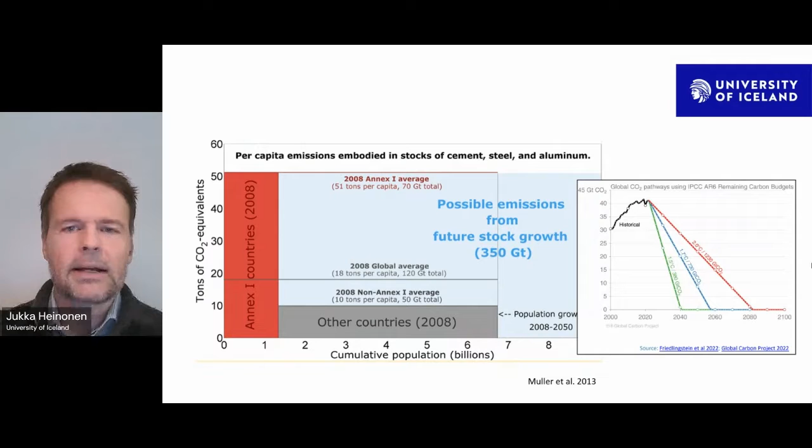And at the same time, when looking at what happens in the most developed countries, it's not like they would have reached some kind of a saturation level beyond which there's no need for additional infrastructure. It looks like the amount of construction is just increasing, and we are now hiding that development behind the general idea of developing a future sustainable built environment, but without thinking about this aspect at all, and starting to assess the emissions from the point when we have a new infrastructure system in use, whatever system it is in question.

What that has led to is, of course, that all kinds of construction materials are being produced to a higher extent than ever before. And I very recently saw a nice illustration of what cement production, for example, means if you try to illustrate it in some tangible way. A journalist calculated that if you produced a typical 30 centimeter concrete pillar, this amount of cement production would be enough to produce a pillar from the earth to the sun each year. Or if you put it in a thin line, you would need to produce it with the speed of light, just to give a little bit of perspective to what this means in such numbers.

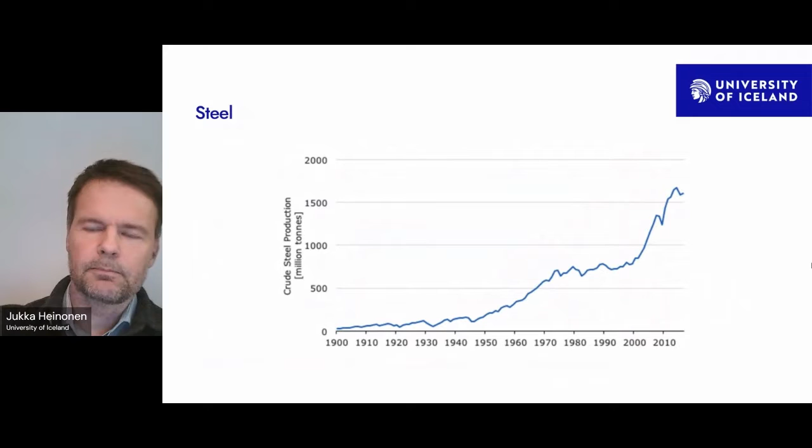There is one sort of underlying issue that I want to pay a little bit of attention to, which is that I see more and more in the construction industry, at least in the context where I work, which is most of the Nordic countries, that these environmental or sustainability certificates for buildings are gaining more and more attention, and they are becoming more and more important drivers for the future transformation of the sector, the industry sector overall.

And to me, it sort of looks like this green transition is more some kind of an illusion of such a transition than an actual transition. And this has a lot to do with the fact that these certificates pay very little attention to embodied emissions and to the pre-use phase overall, which then leads to a false image of a transition that would be ongoing in this sector.

This is a relatively recent paper of ours in which we talk about this issue and actually show that this indeed is the case. And what this leads to is basically an idea that almost the same buildings we used to have, suddenly with one of these labels, be it BREEAM or LEED or one of them, become sustainable or somehow green buildings.

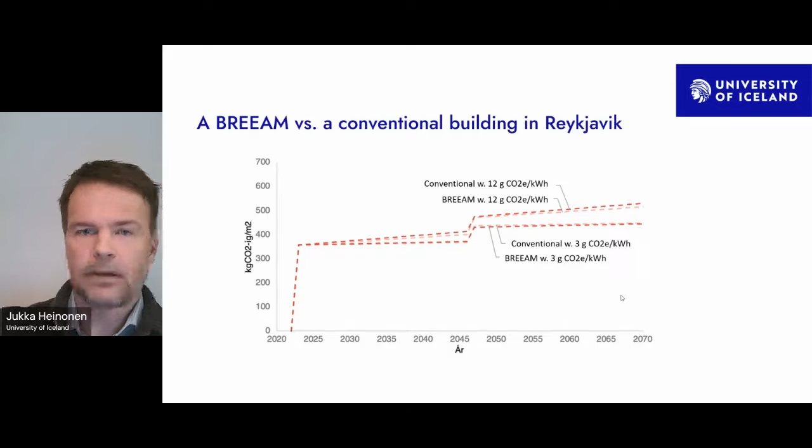I'll come back to end of life later, but when we calculate the end of life using today's technology assumptions, we might end up with misleading results, which would put conventional materials as the preferred option in some cases.

In Reykjavik, this is one of our pretty recent calculations for the city, in which we compare the different life cycle stages and the emissions from them. Reykjavik, in global terms a small city with around 150,000 inhabitants, has high construction activity and is growing fast. What we calculated is that currently the emissions related to the construction of new buildings is almost as much as the energy use of all the buildings in the city.

Looking at the future projection of how much the city will grow within the next 10 to 20 years, we're talking about emissions of around 2 million tons of greenhouse gas or CO2 equivalents from just this one small city. This is quite a big greenhouse gas commitment by a city that, according to its own target, is supposed to become carbon neutral around the same time as it's causing these 2 million tons of emissions. This is not at all included in the city accounts, nor really recognized by the city, hopefully now by some people after our calculation of it.

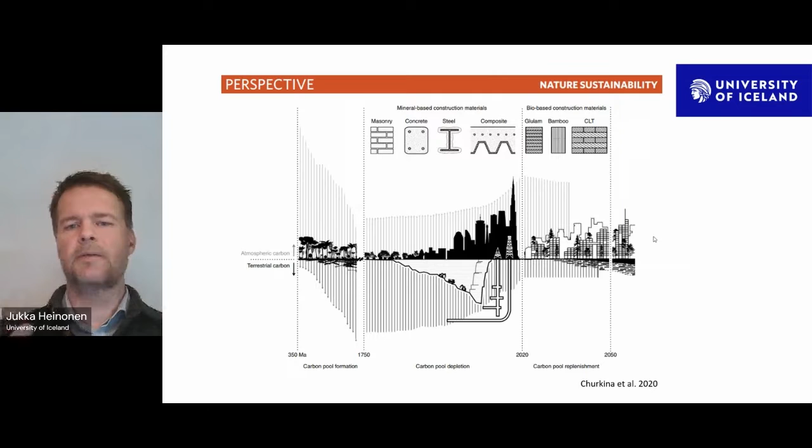Part of the long-term balance, or returning to an acceptable balance, the built environment overall could play an important role if we started looking at it from the perspective of transferring atmospheric CO2 or greenhouse gases back to below-ground and built environment storages, where it would then be stored over a long period of time. Once we reached such a balance, we would have a carbon neutral circle that would maintain this balance over time.

This would require kind of an entire paradigm change in terms of how we see the built environment, but at the same time, with the knowledge we have now, we can basically say that it's possible if we want to do that.

This is the Amiri et al. study from a few years back, in which they looked at different building LCA calculations that have been published in academic sources, and found that a relatively high number of them have found that the stored carbon in buildings using plant-based materials can be more than the emissions caused by those same buildings. So basically this means that on a building level, we can reach this kind of a positive balance.

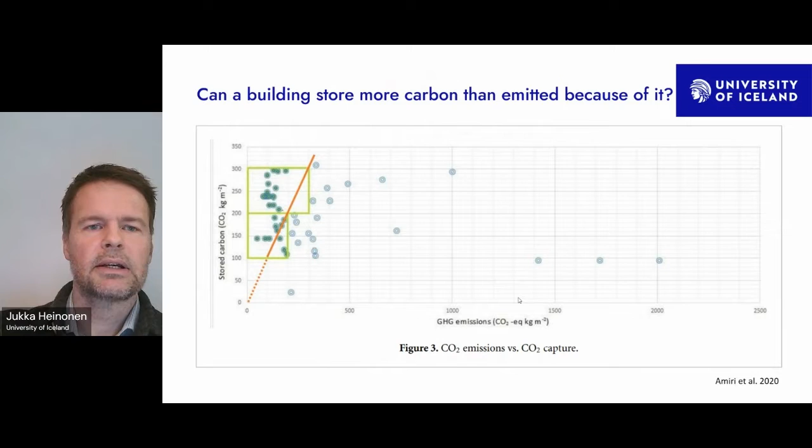And going beyond, this is a very recent study from Talvitie et al., in which they took a step beyond the Amiri et al. study, looking at a comparison between typical forests and cities that would utilize their buildings for storing carbon, and found that the carbon stock of a city can reach the same level or even beyond typical northern forests, which is quite interesting and an important signal

for this paradigm change to be possible, or the result of such a paradigm change to be exactly that the built environment could be an important vehicle in returning to such a carbon balance that would then be the desired outcome of our climate change fight.

And so far, we have basically been only looking at buildings. But of course, buildings are only one, important, but still just one of the infrastructure systems we could utilize for storing carbon and for creating this positive circle of sequestering and storing carbon into the built environment and making it neutral, of course, first, but even carbon positive,

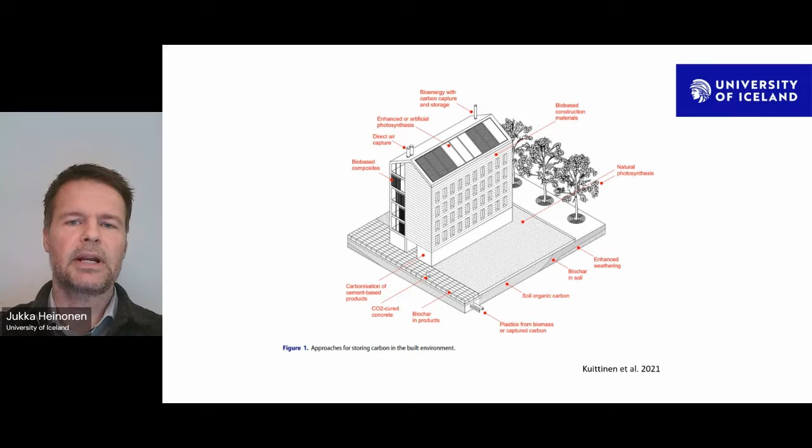And then when we start moving from buildings, where it has already been shown that we can find ways to store more carbon in the buildings than what is caused by those same buildings, when we start thinking about all surfaces that we have in the built environment and look at them from this kind of perspective, we could reach such a built environment that it would be storing more carbon in comparison to what is caused over time by the same built environment.

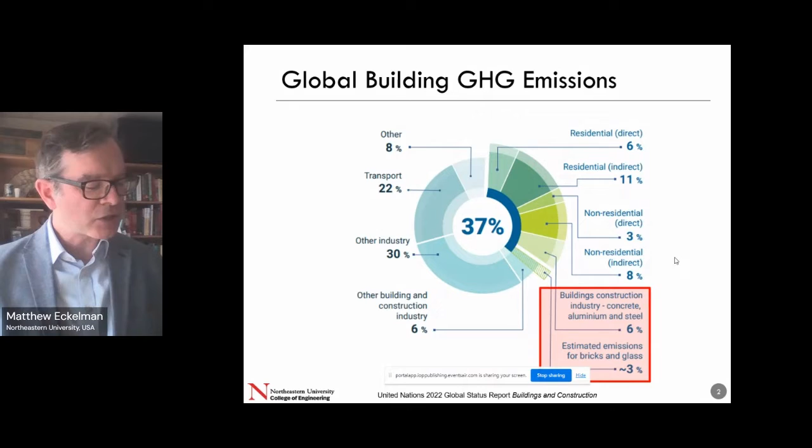I think we all recognize buildings are a very large piece of the puzzle around decarbonization, and especially when we're focused on building materials specifically, it looks like about 10% or so of the overall global greenhouse gas emissions comes from the production of these materials. And because of this recognition and the innovation ecosystem we're in, there are a lot of very interesting innovations happening right now to try to develop low carbon materials, low carbon iron using different types of bio-based reductants, completely carbon-free steel. This is a plant going up in Sweden.

Low carbon concrete that you'll probably hear more about today, various technologies for that, and even low carbon aggregate. So this is a company here based close by to me that's making foamed glass aggregates, very lightweight aggregates out of recycled glass. So actually, I'm very optimistic about the technology landscape that we're seeing around low carbon materials. But those materials have to work together in a building.

And one of the basic questions that we have in this space around environmental assessment of building materials is, which material should we build with? Which material is going to give us the performance we want to make beautiful structures that are high functioning, high performance, and also as low environmental impact as we can get?

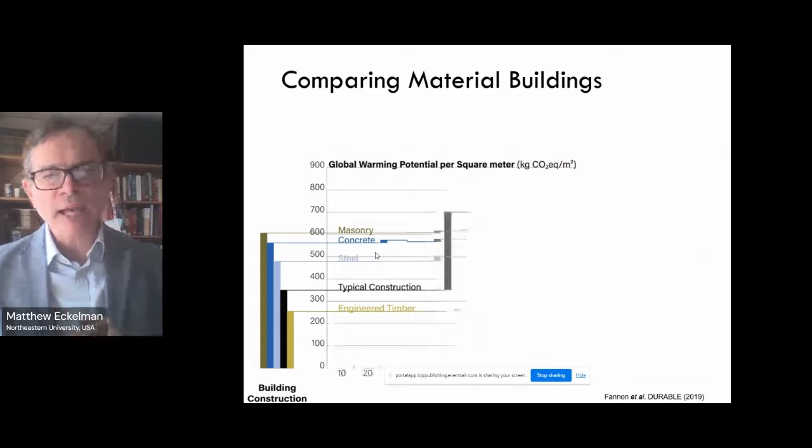But the insight we were looking for wasn't just the construction side. We wanted to see how these different types of buildings play out over long periods of time. And as we extend buildings to a long lifespan, not just a 60 or 70-year default, but a much longer lifespan that we would hope to see for a high-quality building, the impact of replacing poor quality construction, or construction that doesn't have a use, it's not a building that people want to keep around, it doesn't have a way to reuse it very easily.

The typical construction graph you can see gets larger and larger, far eclipsing any of these other buildings, which are designed in a way to be adaptable, to be reusable, and to have a longer life. So the idea here is, regardless of what building material we use, there should be a focus on longevity. There should be a focus on not just the architectural design, but also the structural design around longevity and keeping these buildings in service for as long as possible.

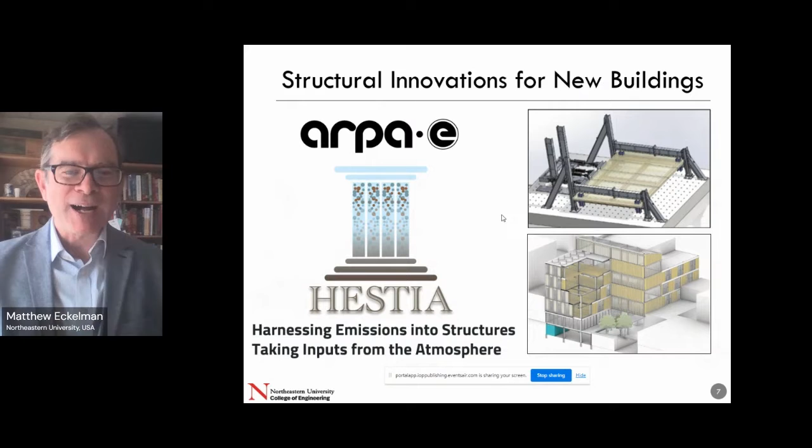Some of you might ask, well, why are we asking this at all? Why don't we just build all wood framed mass timber buildings everywhere? Problem solved. We'll just sequester all this wood in our built environment. And this will help not only with the carbon storage problem, but also with reducing those emissions associated with building materials like steel and concrete that we know to be very important.

So that's a really wonderful progression. But when you look at the market portion, how much of the market does mass timber building have? It's very, very small. One of the reasons for this is that the current ecosystem for architecture, engineering, and construction, the AEC sector, is focused around traditional materials. And people who work in this industry are typically very conservative. They're cautious, and it takes a while for them to become comfortable using new materials like mass timber, for example.

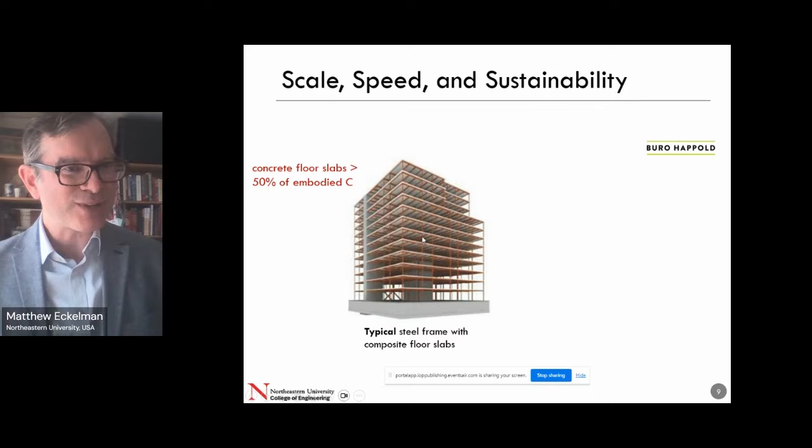So we want to find a way to harness some aspects of wood and also take advantage of the existing ecosystem around steel buildings. So what we're trying to do in this project is to find a way to move from this traditional, typical steel frame building with cast-in-place composite floors, so concrete on steel deck, which has major issues for greenhouse gas emissions. The floor slabs themselves, in a typical mid-rise or high-rise building, are typically more than half of the embodied carbon of the building.

In addition, pouring that concrete takes a long time. It has to cure, and that slows down the construction process. And it's very difficult to reuse these kinds of materials, especially these composite floor systems. So what we're trying to do is look at the same steel frame buildings, but using all cross-laminated timber panels, so wood-based floors. And it turns out these have lots of big benefits for the environment. One is we move away from all that concrete, so we're using CLT. This also helps with sequestering carbon.

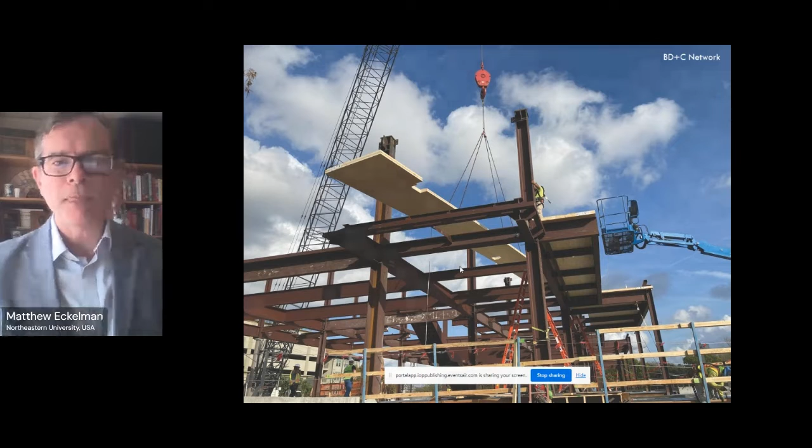So if we wanted to have a CLT-based, wood-based construction project here in my part of the world, we would have to import CLT perhaps from all the way across the United States or Canada. We might be able to import some from northern Quebec, or very frequently we import CLT from Austria. So we have transportation emissions from that, and we're not taking advantage of the bio-based resources that we have. There are some beautiful forests that had been used for many years for pulp and paper, an industry that has really declined in my part of the world. So these are forests with a lot of available wood that aren't being utilized.

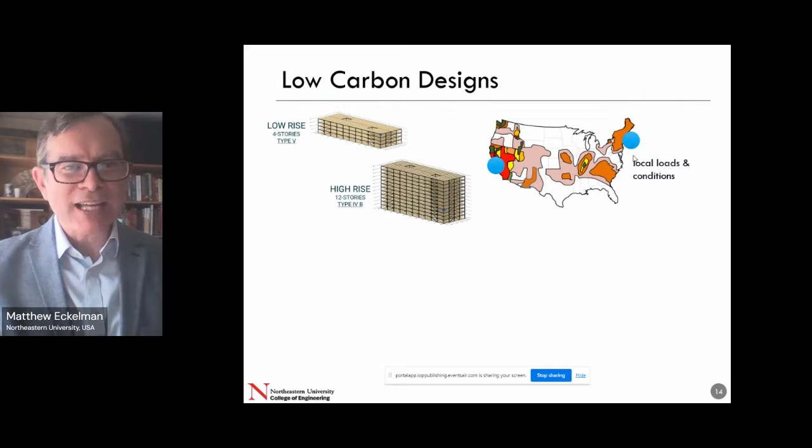In addition to that, we've played around with different structural systems. So what you're seeing in the top structural design here is just a very typical system where you have a standard bay width. So this is, I think, 30 by 30 feet wide bay width. But because those CLT panels are so long, actually they can go across multiple bays. This is something you can't do with cast in place concrete.

So instead of having these steel beams in every bay, actually we can get rid of a lot of the intermediate steel and just put the long 50-foot or 60-foot CLT panels right over 2 bays. And this has major benefits, actually. So we've used some very typical life cycle assessment software coupled with building information models. This one is from a software called Tally, which is a plugin for Revit.

And you can see when we measure the tons of carbon dioxide equivalents of this building, both the steel and the CLT, even just the baseline building, which is the one in the upper diagram there, we're seeing negative emissions. So as long as this building is in service, we're taking advantage of that carbon that's sequestered in the CLT.

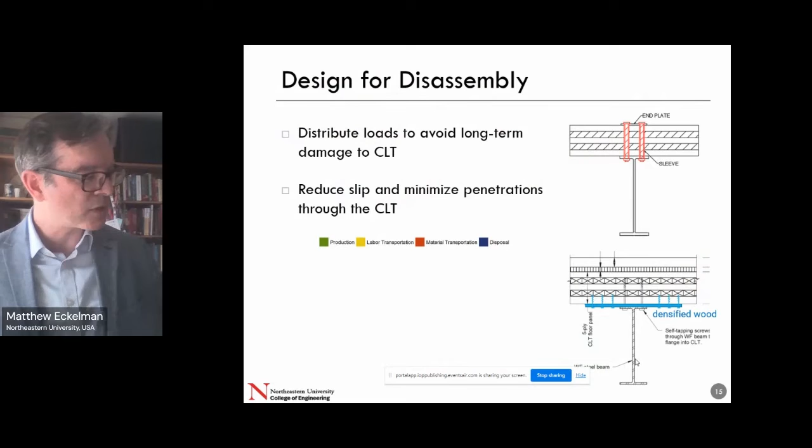This is only one half of the puzzle. The carbon sequestered in a building doesn't help as much if the building doesn't last a long time. And you heard about this from the speaker that came just before me. So another really important part of the work in this project has been to design structural systems between the steel, so the steel member that you see here, the I-beam, and the CLT, in a way that we can actually remove the CLT and the steel, both of them, and potentially reuse them. Take the steel member and the CLT panel, and after deconstruction, put them in a completely new building.

We're seeing this more and more, especially with steel, but so far, this hasn't really been a feature of CLT. Mostly because in order to meet acoustic building codes, we pour a bunch of concrete or gypcrete on top of the CLT panel, making it really difficult to deconstruct in a way that doesn't damage the panel when we take it out. So the idea here is to find these structural systems, test them in a very large laboratory where we build one of these buildings to scale and then shake it until it essentially fails. And we design a system that maintains the performance and allows us to reuse these CLT panels afterwards.

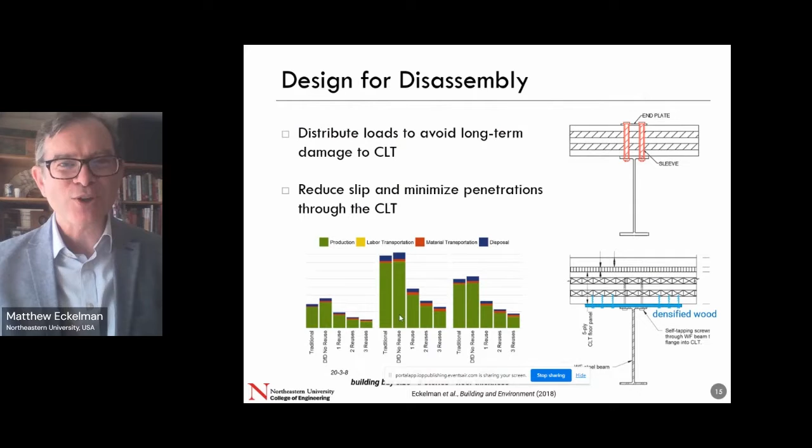A question about costs, perhaps. I really appreciated what you said about the materials and the holistic design of buildings, as well as testing. But do you have a sense of how costs might develop? Yeah, it's a very important question, especially for that very thick CLT panel. Structural engineers are telling us that if you go up to 7 layers, what we call 7-ply CLT, that's sort of the limit in cost of what people are willing to pay for. And if you go to even thicker 9-ply CLT, then this may be too expensive, right?

On the other side, we're still making that calculation in a way that's focused on first cost, even after decades of pushing this life cycle mindset, that it's not first cost that matters, it's the total cost of ownership that matters. And when you look across the life cycle and across multiple life cycles, if you can actually reuse some of these structural materials, you see a big cost advantage. So it may be that the building gets sold, so maybe the person who pays the first cost isn't the person who gets some of the benefits of reusing that material. But it's certainly something that we hear.

So you know the 80-20 rule means that if you're already recycling 70%, getting the last 30% is probably a lot of effort and a lot of cost. And if you get the last 30%, comparing these 8 million tons to the 31 million tons that we demand all the time, you will fill 10% of the demand for new materials.

So my question is, do we really need to get the last 30% at a relatively high cost, at best to fill 10% of the demand, or are there other alternatives? So maybe actually it's already circular, and the question is somewhere else. For me, when we look at construction and demolition waste, we usually forget what we call excavation materials, because it's just a transfer of earth from one side to the other. So they're not considered as waste.

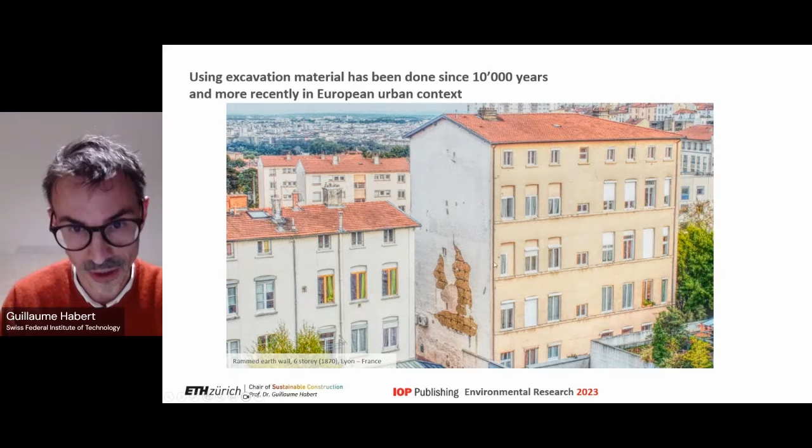At the beginning of the Industrial Revolution, in Lyon, France, 1870, you have these multi-family houses, 6 stories high, and because the plaster is not well maintained, you see it's rammed earth on the wall. So it's a very normal building, but it's actually built with earth. Another building from the same period, different country, in Germany: again a 5-6-story rammed earth building from 1830.

I'm showing you this because it's interesting. Often we say earth is not durable because it can be altered by weathering, etc. Maybe the analogy is a bit easy, but it's always interesting to think of the first concrete building built, at least in Europe, around 1850. That's the 2-story high building of a great engineer, Coignet.

So at the same moment of time, we were building 6-story high rammed earth houses that are actually still there now, and we were trying to build a 2-story high concrete building that is more or less not here anymore. So of course it means durability maybe is a question of maintenance and not so much of the material.

And of course, we might have made quite a lot of progress in concrete construction between 1850 and now, obviously, because now we are building 50 or even more story high buildings with concrete, and we are still building just 5-story, or we are very happy if we are building 2-story high rammed earth houses now. So there's a bit of difference between these materials, but I still think there is now a kind of renewal of earth construction, and I would like to share with you some nice examples.

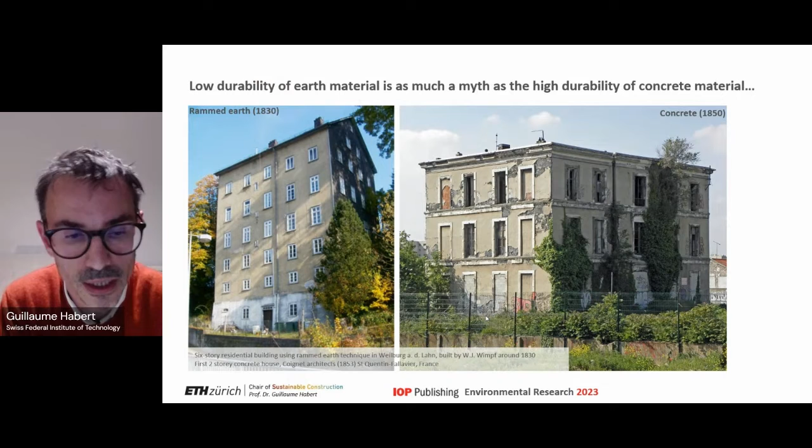Because the problem with using excavation material, so earth construction, is usually that it's labor intensive, which might make it costly in places where the labor force is costly. So basically Switzerland and Europe in general. But we have some interesting examples that are trying to bring this excavation material in an economically viable way. To make it economically viable, you need to speed up the construction. You need to prefabricate, for instance.

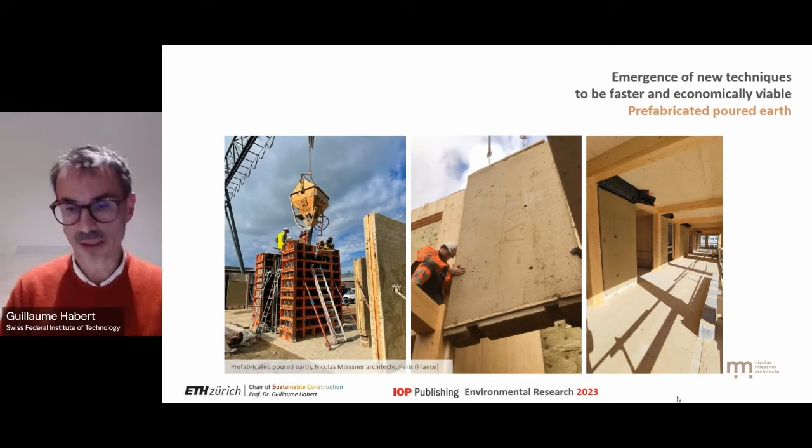You have other types of construction. So before was rammed earth, here it's poured earth. So you prefabricate like a concrete wall basically, and then you assemble. So that's a building in Paris that is currently being built.

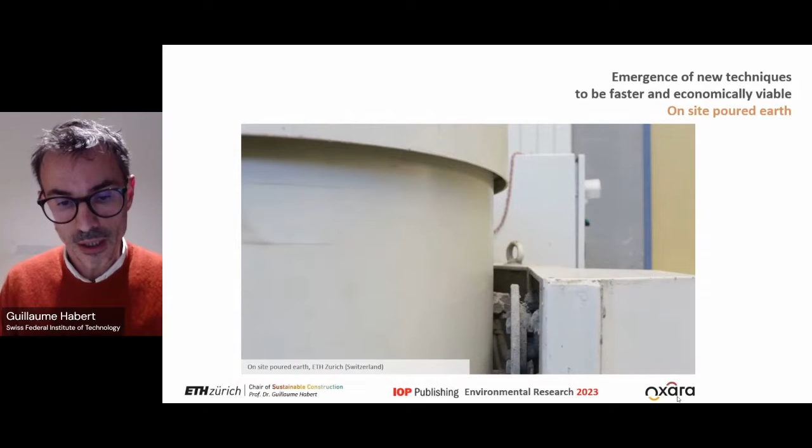What we are doing at ETH is more to work on poured earth, but for on-site applications. So this is excavation material with a bit of chemicals that I'm happy to discuss in the questions. But basically, we try to deflocculate the clay. You deflocculate the clay, which allows you to have a material that is liquid, or at least fluid enough to look like concrete, so that you can cast it in a formwork.

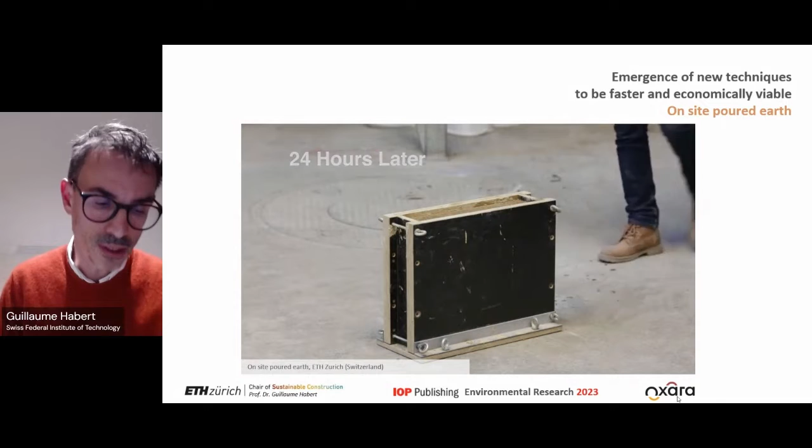Ideally you have a deflocculating agent of the clay, and you have a coagulant agent that is removing the effect of the deflocculation. So basically, you put sodium phosphate, for instance, for deflocculating the clay, and you have magnesium oxide that is reacting afterwards with the sodium phosphate and removing this deflocculating effect. And because you remove the deflocculating effect, you have the same stiff material that you had before. So you're able to demold and remove the formwork, and you have something like concrete.

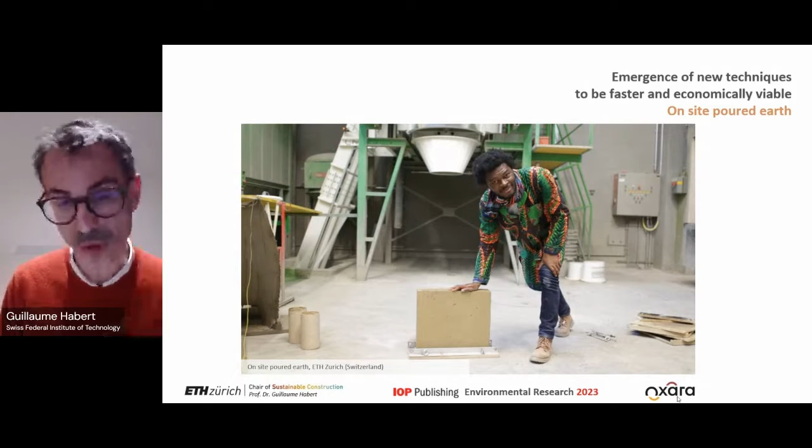This is Gnanli Landrou, who was the PhD student that did the work, and he's really happy to have done the work. And now he has developed a startup in Switzerland called Oxara to promote this kind of on-site poured earth construction. You have other very interesting approaches. I'm making an overview of earth construction, just to show that I think there's now a renewal of possibilities by engineering the materials a bit more.

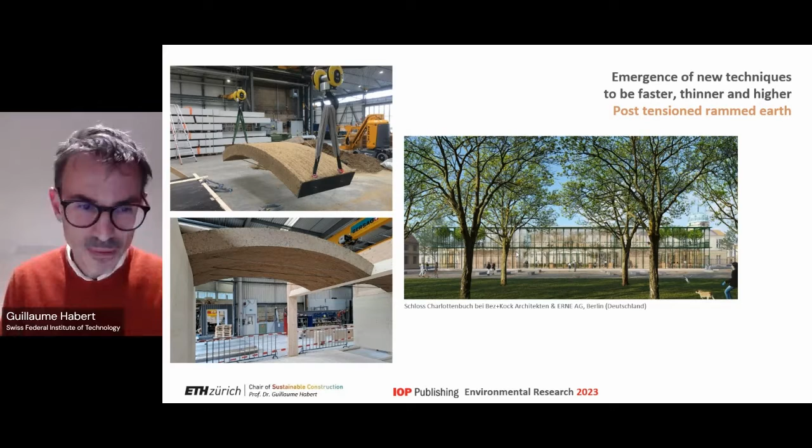You can also have it for flooring. You can have poured earth if you have timber slabs, and then the earth on top. So you have many applications, and so I think it's typically feasible to close this loop of excavation material, if we think about excavation material as earth construction, in that we use, let's say, a contemporary way of using these materials.

And so if I summarize, the construction and demolition waste is already sorted and goes back into recycled concrete. The excavation material could actually be sorted if we could use it with an earth construction strategy. And so then we have closed the loop. So then we are kind of circular, at least 80%, 90%, and the rest is probably enough in terms of cost, feasibility, techniques, and then we still have kind of 10-20% of new materials, and probably we can live with the 10-20% of extra materials.

So if it's circular, then why are we always talking about circularity? And maybe one thing that I would like to show you briefly is that maybe it's because we should not look at circularity from the material perspective, but maybe from a cost or an economic or socioeconomic perspective. I just want to share with you 2 case studies, and then I'm hoping for questions.

The big difference is the money. If you look at where the money is going if you build such a stone bridge, that's a study we have done where we looked at how much money is going for labor, for material, for energy, etc. Then you say, okay, most of the money is going for local labor. Even when I buy material, I actually buy the labor of people that have cut the stone. So actually 70% of the money is going for salary, and for local salaries.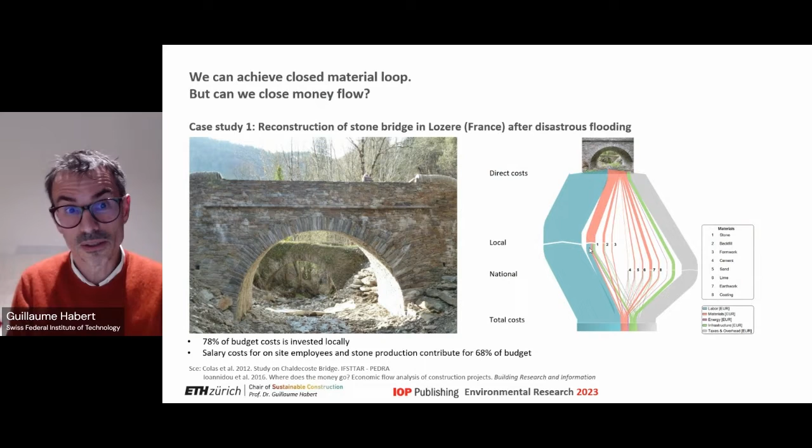So of course the consequence on society, if you build with stone or with concrete, will have a completely different aspect on, let's say, the circularity of the economy, if I can put it like this.

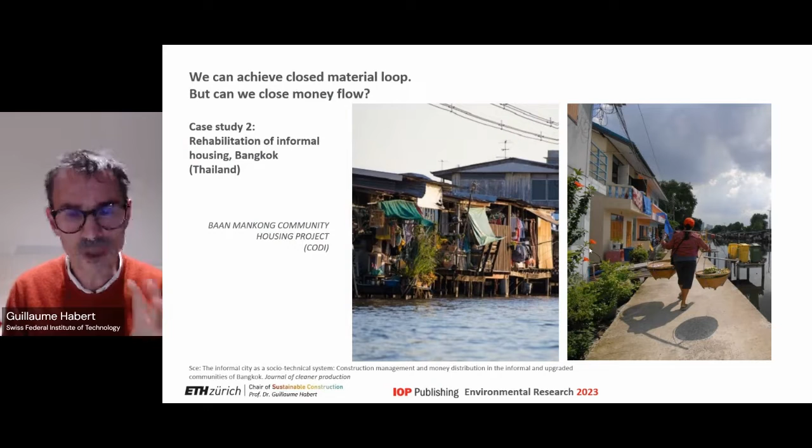Another example, in a very different context, we looked at slum upgrading in Thailand. It's a great program that has been happening in Bangkok for quite a lot of time. And there again, we looked at the flow of money for different slum upgrading possibilities. You need to look at the initial investment. Then you have in green the material costs, and in yellow the labor cost.

So the first way of improving your settlement is when your shelter is, let's say, self-managed. You buy your material yourself, so probably very locally. You hire people very locally also to help you, and then you have an improvement of your settlement. So the money stays very close to the community.

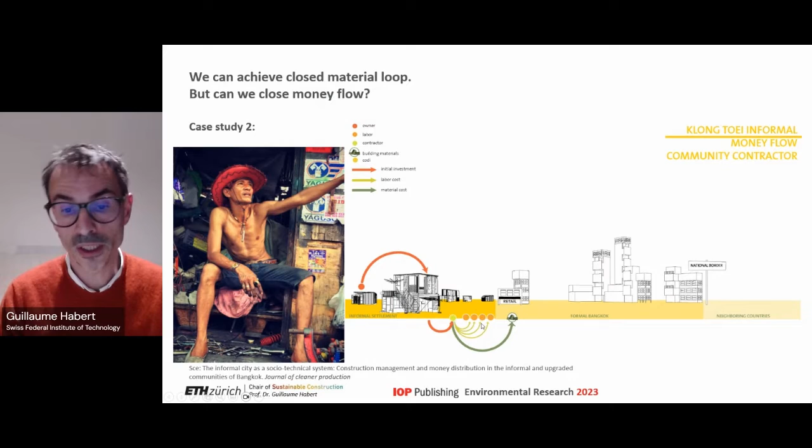If you don't feel that you're able to build yourself, basically because you have another job than one in construction, you will hire a local community contractor. More or less the same amount of money, maybe a little bit more, but you have the local community contractor that again will hire more or less the same people in the community, and will buy the material more or less in the same place.

It will be more or less the same building, except that you're not doing it, you delegate it to someone. And then you could say, okay, what I will do is a program, and that's what happened in the CODI program. I will do a program where the owner of the building will actually put exactly the same amount of money. The government will bring much more money as a loan that you will later reimburse in a 10-year perspective. So you're able to have much more money available.

Because you have much more money available, the technology that you're using is actually concrete pillars, to be flood resistant, which is probably a very good idea, of course. The thing is that with such technology, you cannot do it with your local community and your local expertise. So you need to hire someone outside that will buy the material outside, that will hire the workers outside, and somehow all the money is suddenly driven outside the community. You have a better house for sure, but the consequence is that the money is suddenly driven outside the community.

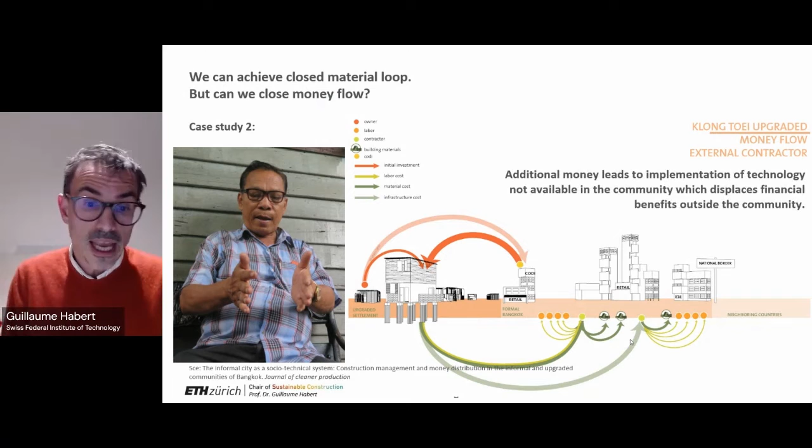And we even have the case where we realized that in some situations, the general contractor outside the community was hiring informal, so illegal workers coming from the neighboring country that would slip into, let's say, the construction site, basically in the slum, in order to rehabilitate the houses of the local community. So at one point, your initial money, helped by the government, is buying material way outside the community, and you even hire illegal workers that will work in the community to improve the settlement.

So from a pure technical perspective, maybe you don't see it, but from a socioeconomic perspective, you have a complete disaster, because you're not improving the social quality, except for the single user of the house. So just to put it like this, there is a problem, and we need to look at the money. So maybe to summarize, what I wanted to say is that construction and demolition waste, I think, is already circular, at least in some places in the world. In others, we probably need to go towards there, but it is possible to circularize construction and demolition waste through recycling concrete.

The problem, I think, is the question of the money, and this is probably where we should think about how a circular economy should also be thinking about where the money is going, and not so much where the material is coming from. How do we map this money, and how do we choose a technology that is triggering some positive economic loop in the community, compared to another technology that can look very similar but is triggering completely opposite development? We need to think about the flow of the material, and we need to think about the flow of the money.

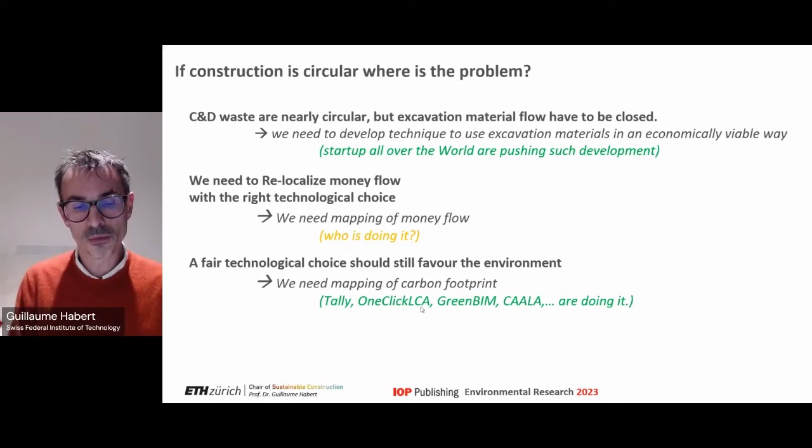We should not forget that the main target is also the reduction of climate change. So we should also look at the embodied carbon and, between two technologies, which one has the lowest carbon footprint. So to summarize, for the use of excavation materials, you have ideas, you have startups, you have plenty of people pushing for such development, even in an economically viable way. I think the money flow is probably the thing that is not very mapped. We have the total cost, but we don't know where and for whom the money is going. And for mapping the carbon footprint, we now have plenty of tools to make the right decision in terms of low carbon footprint. And with that, I would like to thank you, and I'm looking forward to your questions.

Thank you very much for your presentation. I really appreciate hearing not just about material flows and environmental considerations, but also economic considerations. So important. We have a question in the live Q&A, which I'm going to read to you.

I have heard of some companies in Europe taking excavated earth from construction and upgrading it to fertile soil to be used in landscaping. Is this a worthwhile way to reuse excavated earth to reduce environmental impacts compared to reusing it through the rammed earth construction pathway?

So I should check, I think, because I don't know such aspect. It seems, at least from a European perspective, I don't necessarily see the interest. I mean, to make it clear, when we build with earth, we build with the inorganic part of the soil. So typically not the fertile soil, because otherwise you have a very strange smell in your house. So you don't put organic rotting materials in your house. You build with the inorganic soil. And so the topsoil is usually preserved and moved to another place where you treat it separately.

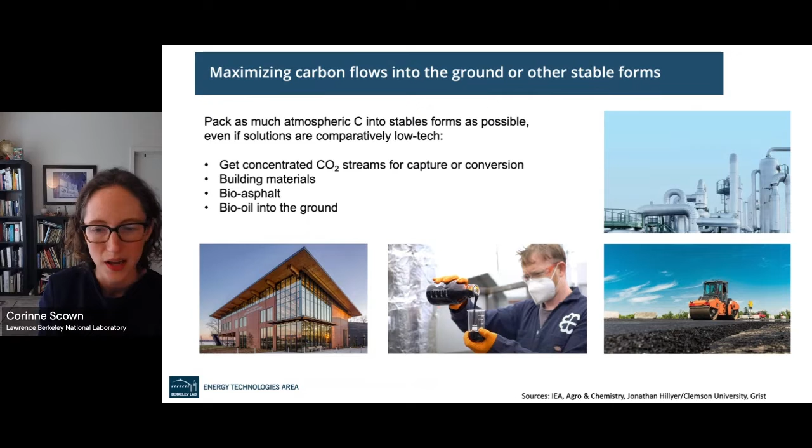So one example is hemp. This is something that we've been talking with some of our agronomist friends about quite a bit. It's of interest in the LCA project that I mentioned that's funded by ARPA-E. And there are a lot of farmers growing hemp and other products along those lines. And sometimes you're just trying to extract a very small part of the plant. So there's a whole industry that's cropped up to extract cannabinoids out of these things, and you have a lot of fiber left over. And the market for that stuff is immature. It is a burgeoning market. They are trying to find value-added uses for all of this fiber. And so that's where we've started to look at options like, quote unquote, hempcrete, incorporating hemp into concrete.

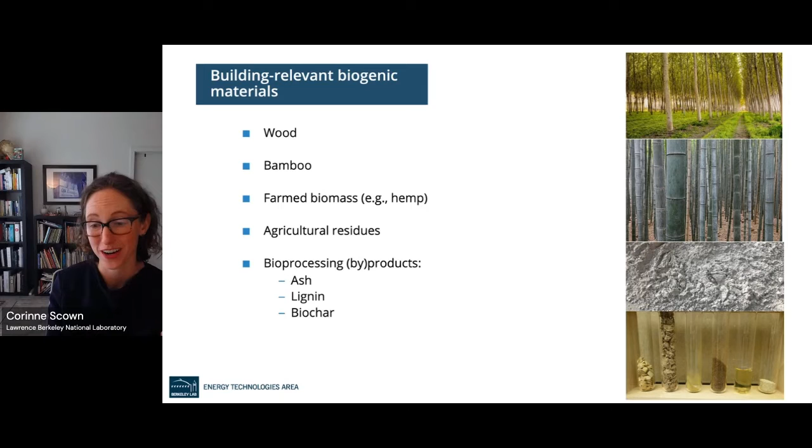Similarly, biochar is something that can either be your primary product, or it can be a byproduct if you're pyrolyzing biomass and you're trying to make either a liquid or primarily a gaseous product. If you're doing gasification, you'll usually get some amount of biochar, and that can also be incorporated into bioproducts. In fact, if you go and look at what's going on in the carbon dioxide removal or CDR markets right now, the vast majority of the transactions are all related to biochar. So you can go to cdr.fyi and see just a long list of people making and selling biochar as sort of cheap carbon removal, to the degree that that works.

So as I mentioned, the composition of these materials, and we usually refer to them as feedstocks, varies quite a bit. So cellulose, usually 30 to 40%. Hemicellulose, maybe 20 to 30%, although that can vary a lot depending on the species. And then you've got all of this other stuff. Ash, that would be the fraction that you could incorporate into cement, proteins, etc.

And so not only does this vary by the plant that you're looking at, it also varies by where it was grown and under what conditions. So a plant that was subjected to drought stress might accumulate more lignin than a plant that wasn't. It'll be impacted by the time of harvest and the maturity of the plant. And your results will also vary depending on what analytical method you are using to try and figure out what the composition is.

So unfortunately, the easy way to do it, near IR, also does not necessarily give you as accurate a picture of what's going on with that plant as using the labor-intensive wet chemistry methods. And so that's just a constant challenge when we're trying to do high throughput screening of plants for different applications, that the compositional data is really not high throughput to generate. And any of the high throughput methods give you worse data.

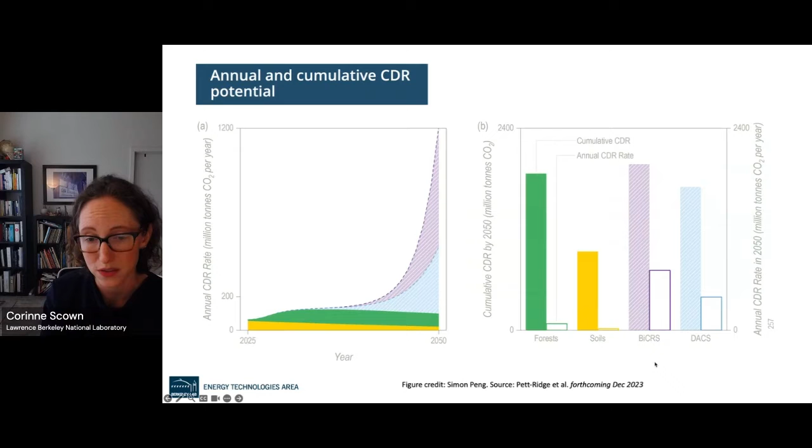So the other thing to note, and these are results that are in the Roads to Removal report. This is led by Sara Kuebbing from Yale and her team. So full credit to them for this analysis, is that the availability of these building materials, the availability of wood, is going to depend a lot on a very uncertain future that is impacted by climate change and also impacted by our choices around how we manage forests.

And so it doesn't mean that you shouldn't change the way we manage forests and take some of those trees for wood products. It just means that it's going to impact how much carbon you're ultimately able to remove and put into a stable form. But relative to the baseline, no matter what, you should be pursuing these options because it does make a difference. Focus on what we can control, right?

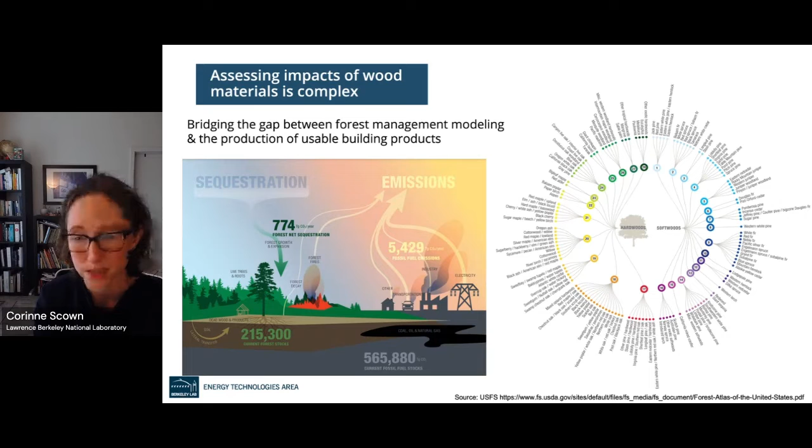The other thing to take into account in these life cycle assessments is, as I mentioned, co-benefits that don't have anything to do with greenhouse gas emissions. Our focus in this project is primarily on carbon to start, and just understanding the carbon flows and understanding how much carbon we can remove from the atmosphere and store, at least temporarily, in building materials.

I think there's several logical jumps there. So this is definitely a tall order, but it's something worth getting our head around, because it means that some of those strategies that are already low cost from a carbon removal standpoint probably flip from being very low cost to being negative when you start to incorporate some of these other externalities, these positive externalities.

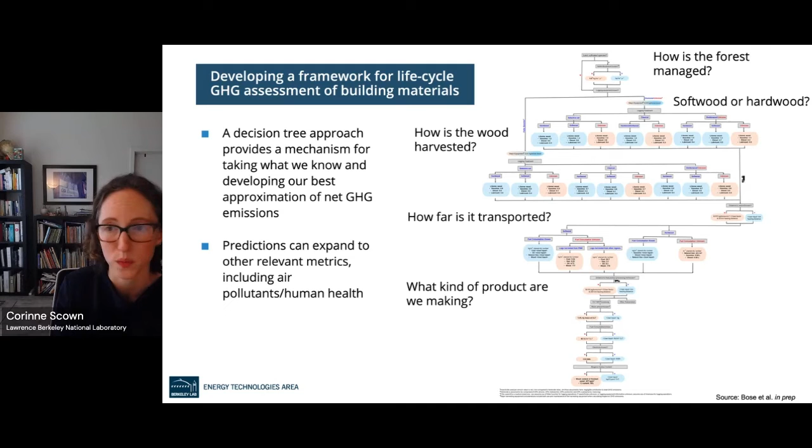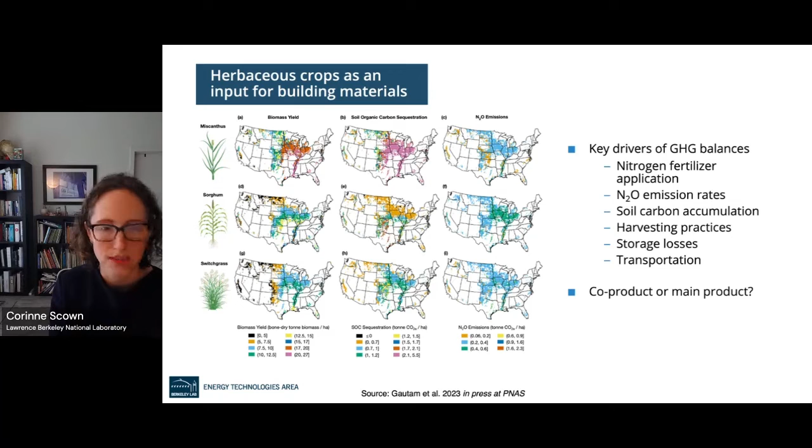In terms of herbaceous crops, we're tackling this separately, and they're actively managed, dedicated fields in some cases. And so you can use agroecosystem modeling or biogeochemical modeling to tackle these questions about how much soil organic carbon is getting sequestered, how much nitrous oxide is emitted based on expected fertilizer application rates, et cetera. And so these are some results that are coming out in PNAS later this week, I think. And we'll be incorporating that for herbaceous products, things like hemp, other ag residues, et cetera.

And finally, I just want to touch on this question of incorporating bio-based materials into asphalt and concrete. This is something that we haven't yet tackled as much in our project. But bio-oil was actually a really interesting situation when we were doing the analysis for the Roads to Removal report. The optimization model really thought that making a lot of bio-oil and putting it in asphalt would be a great carbon removal strategy. And we had to place some constraints to keep it from doing that.

But it does raise this question of, how real is this? Is that carbon stable? Is this something that we should be pursuing? There probably needs to be more research on what that does to the performance and how much you can realistically blend. But that's very much something that would be interesting to keep looking at. And again, incorporating lignin, incorporating ash into concrete, we have to understand what that does to the performance. And that's something that Sabbie Miller, my fellow panelist, is much better suited to answer than I am.

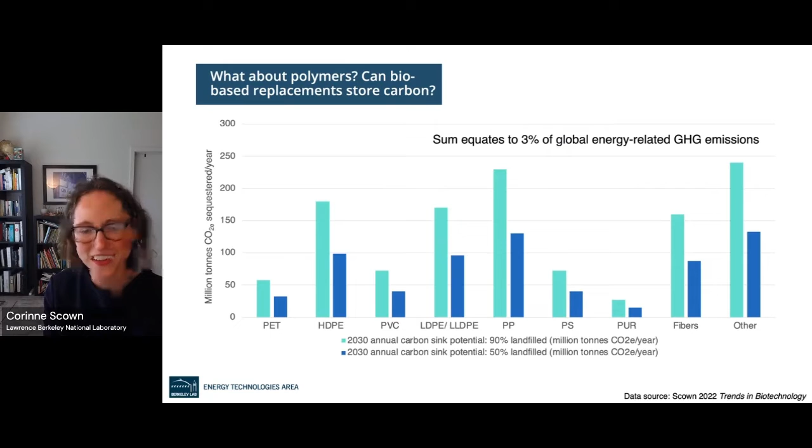So finally, people might be saying, okay, all these wood materials and stuff, but what about the polymers in buildings? We use polyurethane, we use PVC, we use all kinds of stuff. Is that a good strategy for taking biogenic carbon and storing it in buildings that might sit around for several decades? Basically, I think the answer to that is, nah, I wouldn't prioritize that. The reality is that most of the polymers that go into building and construction are not ones that we are typically targeting as bio-based products.

And they also have a relatively low carbon content. So PVC is like 38%. Other polymers are just a much better fit for that. They're 70 to 90% carbon. And ultimately we want to promote, I think, circularity over trying to treat these as carbon sinks and then landfill that material. So looking ahead, we're going to keep building out this decision tree approach. I'd be happy to take some feedback on that.

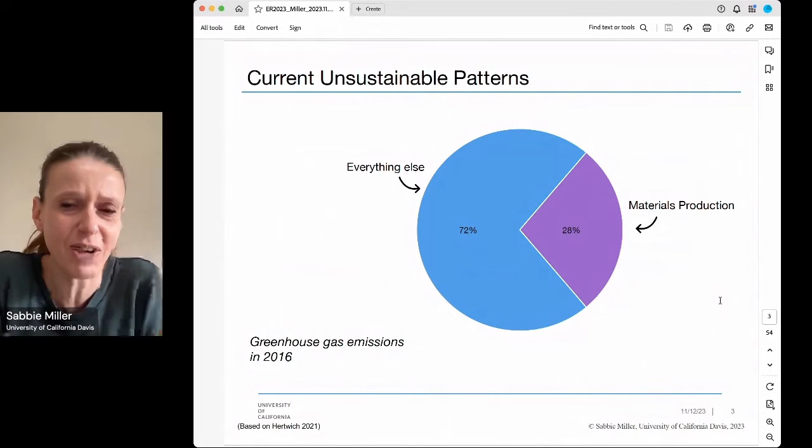So right now we have several unsustainable patterns that we are following as a society. One of them, sadly, is tied to materials production. So this is a pie chart of greenhouse gas emissions. It's just a snapshot of 2016. And in 2016, approximately 30% of our greenhouse gas emissions could be tied to materials production. So it's not exclusively the chemical reactions in the materials or the energy for the materials, but also their supply chains associated with them. But almost an entire third of our greenhouse gas emissions just to produce the materials that we consume. And a lot of those materials end up in the built environment, which is why there's such an emphasis on, well, can we turn those into a carbon sink?

So this chart is just showing a handful of the materials that we like to use in the built environment. You'll notice that wood is not on this chart. It's also one of our large consumers, although nowhere nearly as high as concrete. And just to give you a sense of approximately how much of these materials we made, again, this is kind of a snapshot in time. There's approximately 0.06 gigatons of aluminum made annually, around 0.4 gigatons of plastic.

So as Corinne just mentioned, this isn't going to be our biggest sink because it's not a huge amount that we're producing, a little bit under 2 gigatons of steel, approximately 2 gigatons of asphalt pavement, again, tying into that last presentation of, ooh, maybe this is a location where we could start to place some of our materials that we want to turn into a carbon sink. A fair amount of bricks are produced annually, although the data are not perfect there, and around 30 gigatons of concrete.

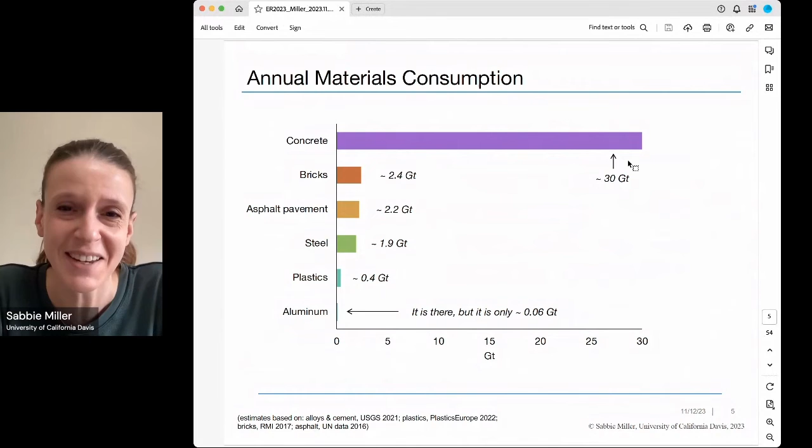Now, of course, this does pale in comparison to some of our other consumption patterns. Specifically, we like to use a lot of water. So in terms of our demands as a society, we have large consumption patterns elsewhere as well.

But to have this much of our solid mass being something that we're synthesizing annually, well, how can we start to engineer that better to both mitigate those huge emissions and then, of course, potentially turn it into a net benefit instead of a net harm to the environment? And of course, we have to do this in a balance of, well, what do we actually need?

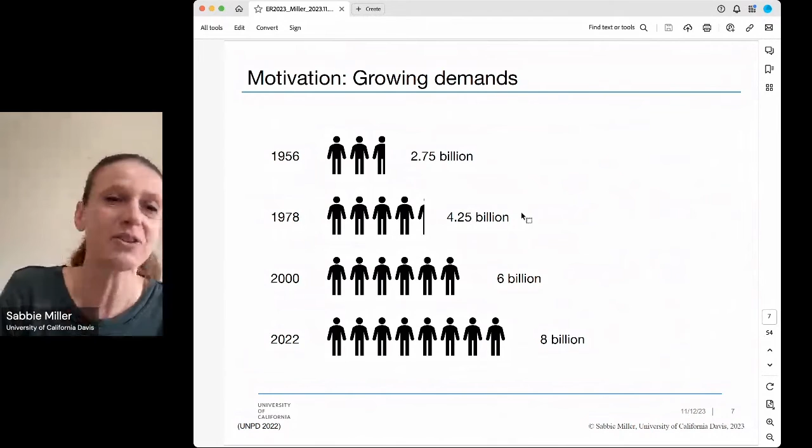And keeping in mind that we've had a pretty linear increase in population, this is one of our primary drivers. So if you look in kind of 22-year chunks, we went from 2.7 billion people on the planet all the way up to exceeding 8 billion people on the planet in a very, very short time horizon. And in that same time horizon, we had a massive escalation in gross domestic products, basically huge escalation in wealth and affluence at the same time.

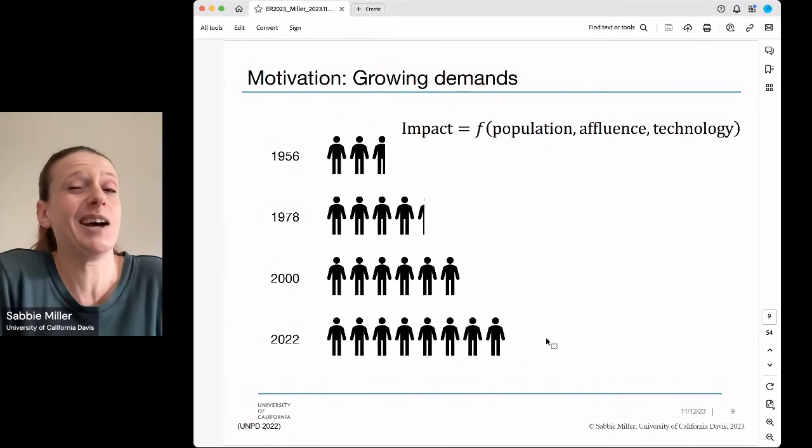So as I'm sure most folks on the call are well aware, we can oftentimes see the impacts associated with society are tied to factors such as the population growth, such as affluence growth. And oftentimes we're relying on technology breakthroughs in order to mitigate impacts if we have growing population and growing affluence as we currently do. And specifically with our built environment, that's where the vast majority of our materials are going.

So this is approximately the mass of materials that were produced and used from 1900 up to 2015. And you could see that, yeah, we needed a lot of food and feed for our animals as well. We also consumed a bunch of energy in that time horizon. However, if you sum up the food, feed, energy, and other materials that we were consuming, it about equals the amount that we were sticking into the built environment.

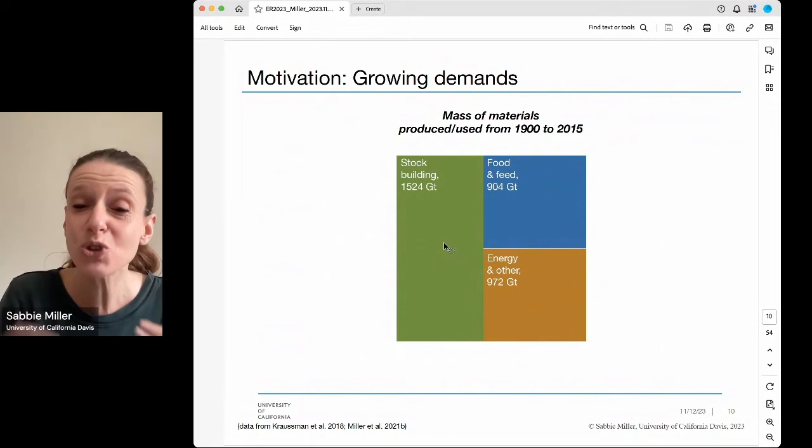So how do we start to re-engineer our built environment to have more benefit? And again, this ties back really heavily to the fact that we are having continued escalation in consumption, and the built environment is where we use our materials for the longest period of time relative to our other consumption patterns.

So what we end up seeing is, okay, not only do we have growing population, not only do we have growing affluence, but per person, we're driving up the amount of demand that we have. And then pairing that with the fact that we hold on to our materials in the built environment for significantly longer than all of our other applications, we're seeing an accumulation of materials in the built environment.

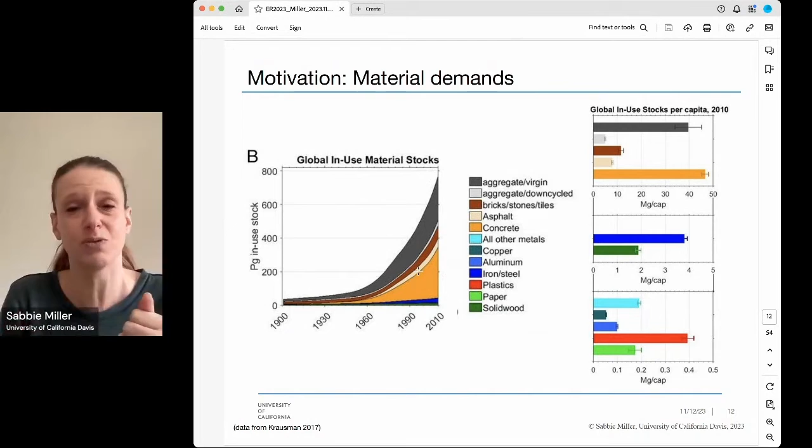And as we could see, concrete, asphalt, bricks, aggregates that we're using as things like road bases, those are making up the vast majority of the materials that are currently in use. So not only the materials that we produce a heck of a lot of each year, but also the ones that we are using for so long that it's such a large mass of materials that we have in the environment that we've synthesized.

So what this means in terms of environmental impacts is a variety of things. First of all, we like building materials. We like to have buildings. We like to have roadways. We like to have sewer systems. So we need those materials for things like structures and services.

And of course, in order to make materials, well, we have to consume a certain number of resources, right? They don't just suddenly appear out of thin air, and we need a certain amount of energy to process those resources. Also, we need a certain amount of energy for our structures and services. So, for example, my computer is on right now and plugged into the wall. I'm using electricity. So we also need that energy for the structures.

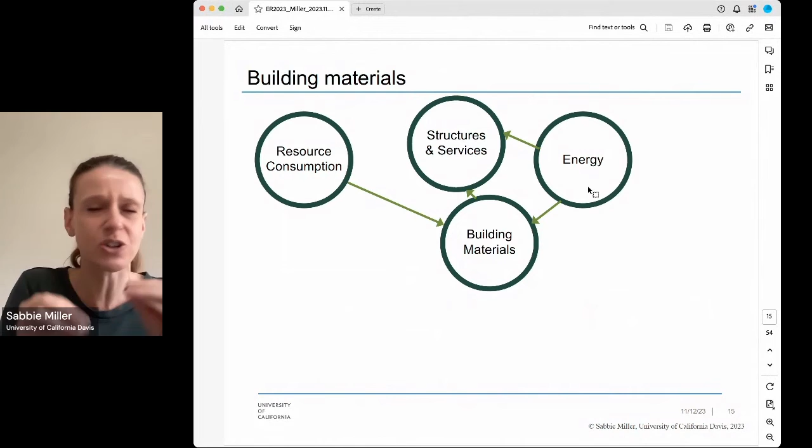And of course, depending on the materials we pick, it could actually influence the structural thermal demand and other aspects of the structure's energy consumption. And of course, we actually need the structures and services for our energy supply, right? We actually need materials to facilitate access to our energy resources. So there's a little bit of a circularity showing up right here. But of course, that's not where it stops.

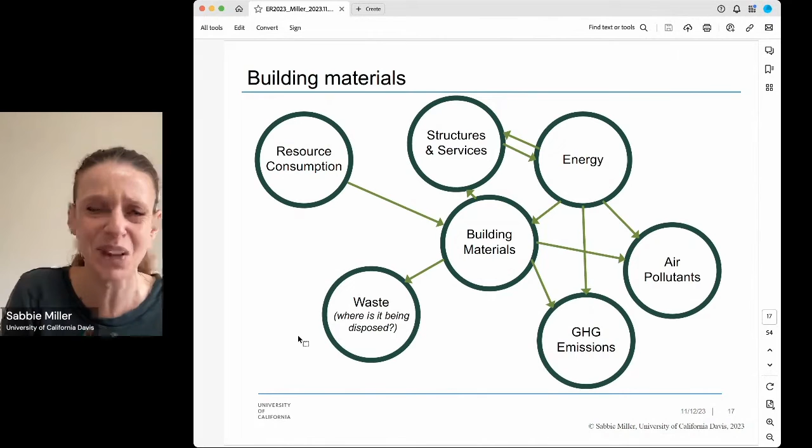In reality, we don't have any perfectly efficient ways to produce our building materials, so there's going to be some waste in the processes that we use. And then on top of that, we have greenhouse gas emissions associated with things like just simple chemical conversion from producing those materials, as well as the energy resources that we use for those materials. And then on top of that, we also produce air pollutants from the energy resources themselves, because we're still kind of fans of fossil fuels, and from the building materials themselves.

So this could include things like particulate matter from quarrying activities. That could lead to localized air pollutants. And of course, localized air pollutants then could lead to health impacts. And actually, greenhouse gas emissions can lead to climate change, which can lead to health impacts. And of course, we know that there's an energy-water nexus.

So our water demand relies on a certain amount of energy, and our energy relies on a certain amount of water. And we also use water for the processes to make our building materials, for things like dust suppression, as well as chemical reactions that are necessary. And then on top of that, we also have the potential for water contamination from like mining activities for our building materials. The list goes on.

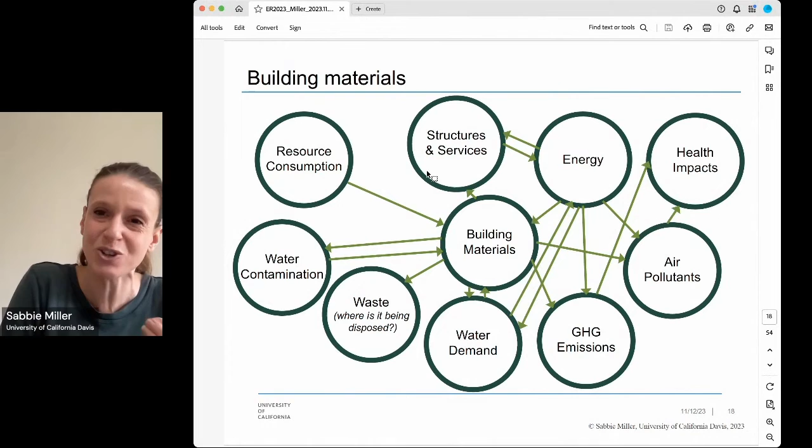Basically, any change that we make for these materials, if we're trying to decarbonize our emissions, or if we're trying to tackle some other challenge like air pollutants, it could have a more networked effect and include things like Corinne mentioned, changing the functionality of the services and structures that we've become so reliant on.

Now, tying back to greenhouse gas emissions, since that's what we've been chatting about a fair bit today, well, okay, we know that about 30% of the greenhouse gas emissions in 2016 could have been tied to our production of materials, but which materials exactly? Well, a fair bit was tied to iron and steel, as well as cement production. And keep in mind, cement is just one constituent in our concrete.

For both of these, not only do we consume a lot of cement annually, about 4 gigatons, and a lot of steel, again, about 2 gigatons. But for both of these materials, we also have chemical-derived emissions, basically the chemical conversion processes that are used in our blast furnaces from our iron ore, the iron oxides. That reduction can lead to carbon dioxide emissions.

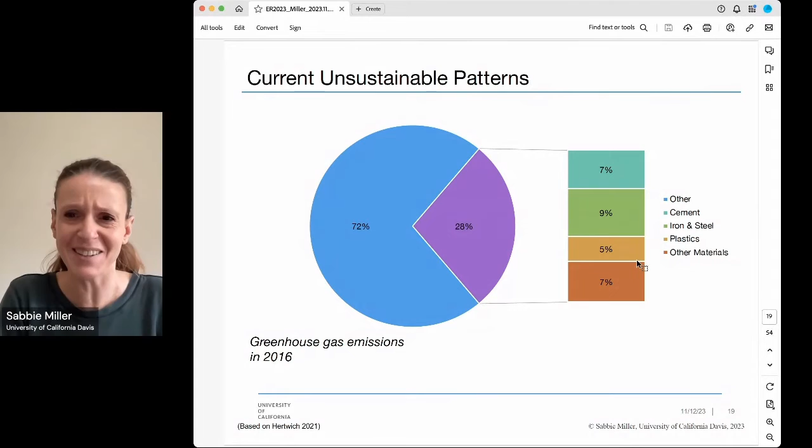And in our cement production, the limestone decarbonation, that's a precursor to the final cement, that can lead to some carbon dioxide emissions. And then on top of that, we have energy inputs for all of these types of materials. So how do we start to decarbonize, as well as ideally lead to a carbon uptake mechanism? And then, of course, how do we pay attention to those other impacts as well?

So just using concrete as an example, because we consume so much of it, well, about 3% of our energy demand every year goes into the production of concrete. We also end up seeing that emission of dust can lead to things like about 5% of our anthropogenic PM2.5, so not including the forest fires that Corinne just mentioned.

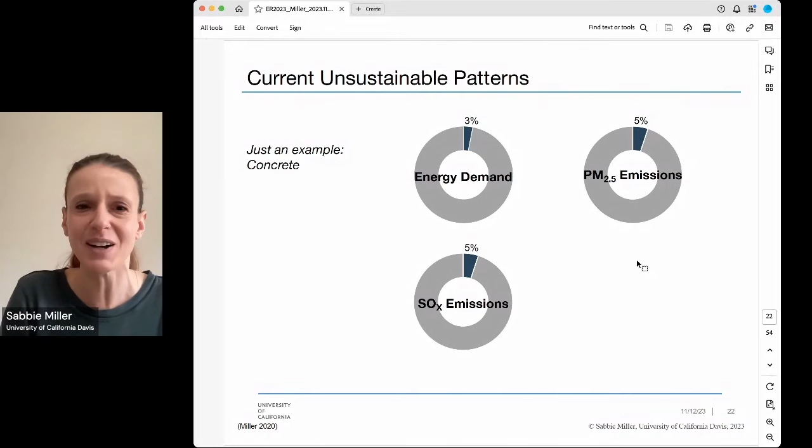We also end up seeing that the fuel resources, as well as if there are any sulfates present in the mineral deposits used, can actually contribute to about 5% of our global SOx emissions every year, just from producing our cement and concrete, and around 8% of our NOx emissions.

So if we go in with a strategy that's targeted at decarbonizing or targeted at creating a carbon uptake mechanism, well, we got to make sure that we're not going to increase a lot of our other burdens that are also going on for the production of this material. And that also ties into resource consumption patterns.

So we end up seeing, if we have to produce things like 30 gigatons of concrete, well, we need some resources for that. And that includes things like sand, aggregates that are used, so larger crushed rocks that are used in the material, water consumption, both for use in the material directly, as well as all of these processes that get leveraged. And then, of course, energy consumption. And we've actually seen that less than ideal management of those resources can lead to localized scarcity.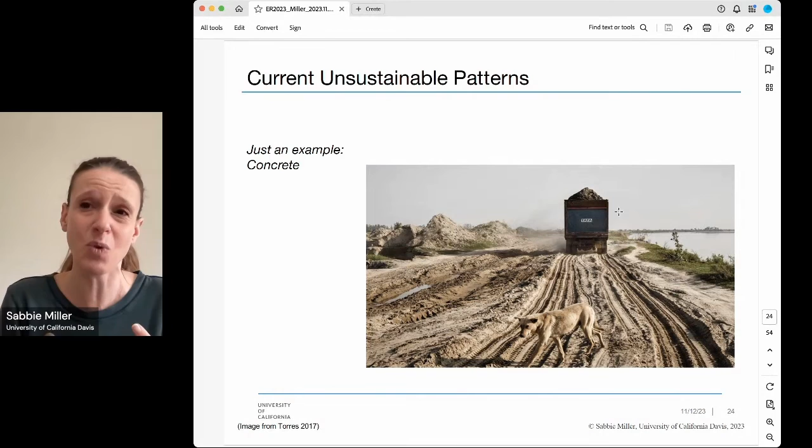So perhaps we do have plenty of sand on the planet, but is that sand the correct characteristics that we need for concrete? Is it in the correct location? Are we managing those resources properly? Or are we causing a localized depletion or other localized social instabilities associated with that high level of consumption tied to the materials? And if we want to make a change, how do we target those other issues that could come up at the same time?

And one of the best ways to do this is to, as all the other speakers have mentioned, design throughout the entire life cycle. So what resources can we leverage? If we start to switch the resources that we use, can we actually have co-benefits? Can we actually minimize the other burdens that we would tie to the built environment? What manufacturing alterations can we start to leverage?

Increased efficiency is fantastic. That's going to lower our energy demand. That's going to lower the emissions associated with energy resources. But how broadly can we apply more efficient technologies? Are there other ways that we could start decarbonizing at the manufacturing stage? How applicable would things like carbon capture and storage actually be for different types of technologies that are getting utilized?

For transportation and assembly, how can we improve material efficiency, for example, at the construction stage? Can we start to have less construction waste for some of our applications? How can we start to leverage resources where we wouldn't have to transport the goods very far, potentially increasing transportation-related emissions from increasing that distance, but also displacing some of our impacts?

So it kind of pairs with NIMBYism, right? I don't want that construction facility in my backyard, so I'll just move that facility to another location, drive up the greenhouse gas emissions from schlepping the material back to my particular location, and also displacing any localized air pollutant production to some other location where a different population has to get exposed to it.

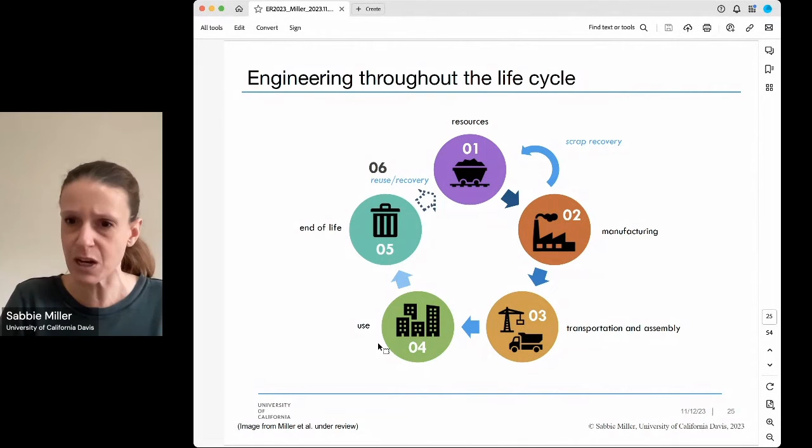And then, of course, how can we start to improve use of these materials? How can we elongate the service life if the material is still functioning so that we can maintain any carbon that's stored in it and potentially offset the demand for new material production? If we do have to dispose of this material, what's the best way to dispose of it? Should we try to lock in whatever carbon's there? Should we try to recover some energy? And can we actually recover the raw material itself to offset our demand for resources?

And of course, as was mentioned by Corinne, we have to pair this with what the material must do. This is a cartoon sent to me by a friend where basically somebody's talking to a scientist and saying, we've made your environmental report greener and now uses 50% less paper, but that is not going to perform properly as a report. Try reading something where half the paper has been cut out.

And so, of course, as we start to pair this with the built environment, if these are the materials that we use for a long period of time, these are the materials that we need to have be durable for a long period of time, maintain their functionality for a long period of time. So how do we integrate that with our quantification of environmental impacts in order to make the most sustainable solutions?

And of course, material efficiency plays a really strong role in this. This is kind of a reboot of a material use hierarchy where we're focusing predominantly in on building materials, where things like less construction or more efficient cross sections of members can start to drive a reduction in the actual amount of materials that we need to consume.

If we do need to consume those materials, how can we start to better reuse them? Can we start to use standardized component connections, prefabricated panels, as Professor Eckelman mentioned, all of these ways to start to leverage that material over and over again? If we can't continue to leverage the material because maybe it's lost some of its performance, can we start to recycle the resources? So again, we could start to offset resource consumption, and this can include things like using those resources as new material generation.

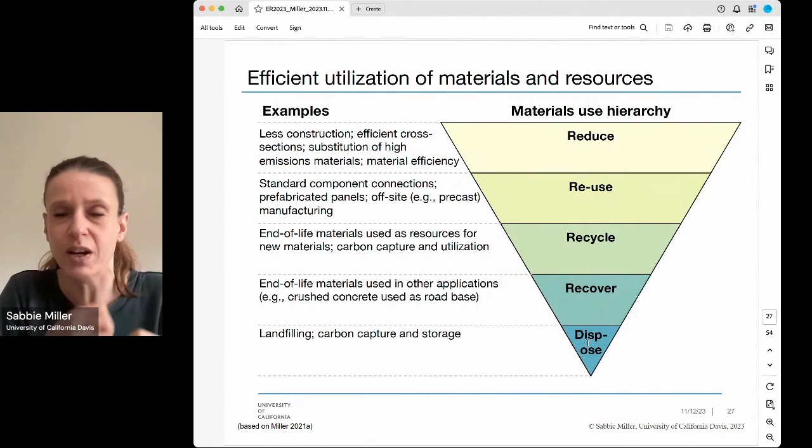Can we recover anything from these materials if we can't recycle them? Maybe we should be trying to leverage them for energy resources if they have a certain calorific value. Or are we actually better off landfilling them and storing that material in the soil for a long period of time. And of course, pairing that back with where are we consuming those materials? Well, keep in mind that by weight, we are using a significant amount of building materials currently. And then, of course, keeping in mind how producing those materials ties to greenhouse gas emissions.

Well, just as an example, cement, it's pretty close to a 1-to-1 ratio for the amount of greenhouse gas emissions per kilogram of cement. So approximately 1 kilogram of carbon dioxide equivalents per kilogram of cement produced. It's a wee bit lower, closer to like the 0.8 region. In terms of our aggregates, which are used in concrete, that's a huge mass of materials, but it's mostly just quarried and crushed rocks, which means not too high in terms of the greenhouse gas emissions per kilogram of aggregates. And in fact, the huge amount of emissions tied to aggregates is only a function of the huge amount of aggregate production, right? So it's much smaller than the production of cement in terms of greenhouse gas emissions.

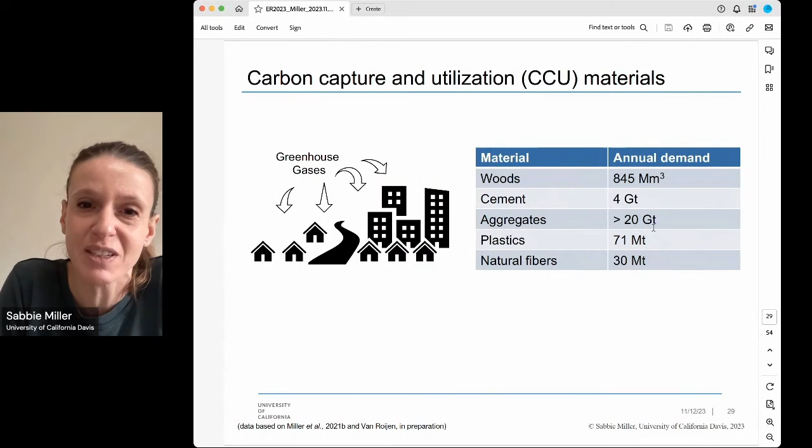In terms of wood, well, yes, there's definitely emissions associated with things like sawmilling activities, transportation, but there's also uptake associated with wood. So how do we start to balance all of these parameters along with decarbonization efforts and tie them to these goals of carbon uptake? Well, if we need all of these materials for long periods of time, we could start to re-engineer them ideally as a carbon sink where, for example, our aggregates are a huge mass of materials. They're already relatively low emissions in terms of production. Maybe we can come up with a pathway that leads them to be a substantial carbon sink.

Or if that's too difficult, because that would require potentially a lot of resources to create that carbon sink, maybe we'd be better off trying to re-engineer something where we already know strong pathways to create a carbon uptake mechanism, because maybe that is going to be a lower hanging fruit. So for example, the plastics and woods that have been mentioned already today.

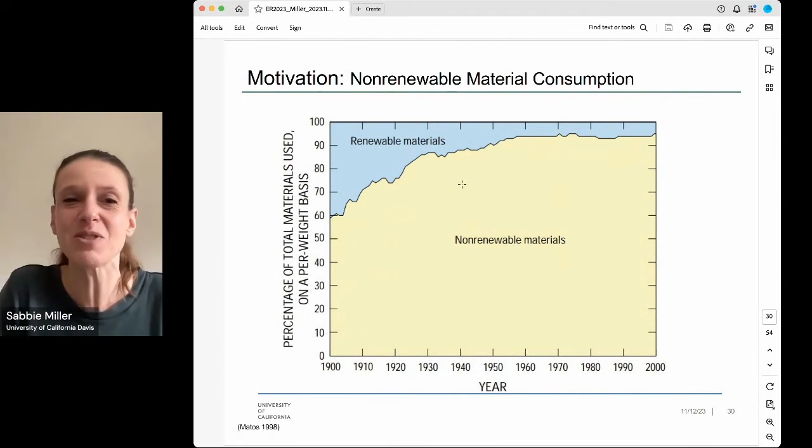And of course, keeping in mind how much renewable versus non-renewable resources do we actually demand. This is just a snapshot of the United States for a 100-year time horizon. And you could see that we've had a pretty strong pivot towards the utilization of non-renewable materials in terms of the mass of consumption that we've been demanding. This is in large part actually tied back to those aggregates that we use in concrete. We have a lot of concrete in this country for our roadways, our building foundations, our sewer systems, et cetera. And we end up having a large weight fraction of concrete being present. So even though we're still consuming renewable materials, we actually have a large mass that's from non-renewable resources. So how can we start to pivot that towards renewable?

And then, of course, keeping in mind that our renewable resources, as we currently consume them, aren't directly going into the built environment consistently. So yes, we absolutely do produce lumber. And yes, that has a relatively long in-use period compared to some of our other biogenic materials. But we also produce a fair bit of paper and board. In fact, that's one of our bigger sources of where we send our wood-based materials. We also use wood-based materials as an energy resource.

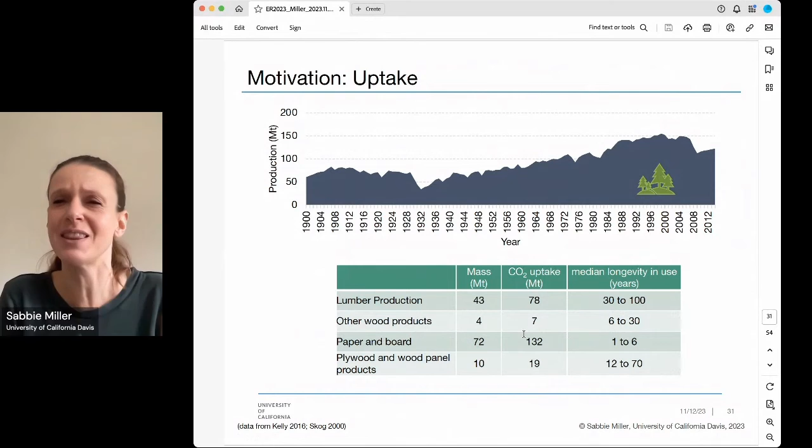And for energy and these shorter-term products, we don't necessarily hold on to the carbon as long as we would for a building material application. And that could actually lead to, as has been discussed, these dynamic fluxes where maybe it took decades to absorb the carbon dioxide, but we're releasing it at a slightly different time horizon. And that brings us to how we could start to re-engineer the materials that we're already big fans of. So bioplastics were already touched on in the last presentation.

Just to kind of give you a couple of different areas that these have been explored. Well, there's TPS as a bioplastic that has been explored using things like reclaimed potato starch, corn sources. We've seen a lot of biosynthesized plastics that already have the same molecular structure as our conventional plastics. So instead of a petroleum resource for the carbon, it's a bioresource for the carbon, but it's the same molecule structure. So that includes things like bio-PTT, biopolyethylene, bio-high density polyethylene,

polyethylene terephthalate. And we have a fair number of plastics that are synthesized from bioresources but don't necessarily have an analog in the current petroleum-based plastics. So that includes things like polylactic acid and polyhydroxybutyrate, where we are able to synthesize these plastics, but they don't necessarily map directly onto a conventional plastic.

And of course, there's many different carbon resources that we could be using for each of these types of plastics. These include things, as I mentioned, like the potato starch, corn, wheat, sugarcane. We actually see the potential for landfill biogas, somewhat uniquely for the polyhydroxybutyrate. There's other pathways for it too, but interestingly enough, polyhydroxybutyrate can be synthesized with microbes that can be methanotrophic. So you could actually feed them the methane from landfill biogas directly. We also see different types of oils getting used. So rapeseed oil, used cooking oil, to try to synthesize each of these different types of bioplastics.

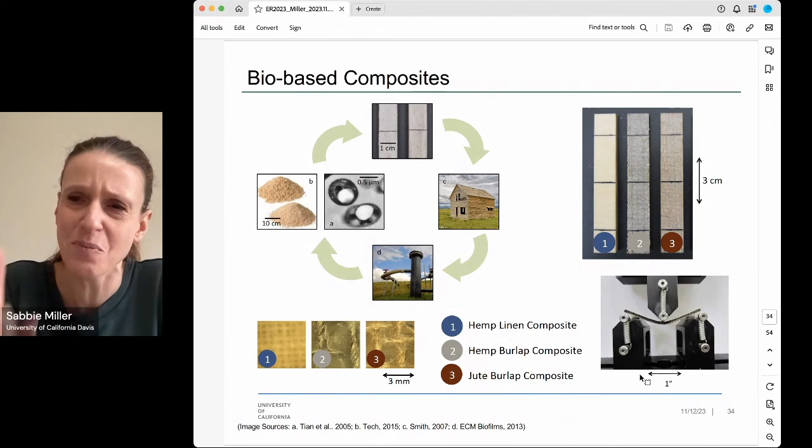And this is just a snapshot of some of the bio-based composites that we've been engineering in our group, as well as some of the mechanical testing that we've been performing on them, because again, we need to make sure we get the same performance if we want to replace our conventional materials. Here's just a quick image of scanning electron microscopy where we're starting to see how we can improve interfaces between our fibers and our polymer matrix if we want to drive up an increase in mechanical properties.

Where you see here, no treatment whatsoever leads to a pretty big gap between the fiber and the matrix. But if we start to apply a coating on the fiber, we could get a better bond. Or if we start to graft the polymer, we could get a better bond between the polymer and the fiber. And why that's important is that we can start to engineer even better material performance than what we're used to.

So here we're looking at a conventional polymer decking. So you might have seen these, Trex is a really common brand of these. Here we're looking at a modulus of elasticity. Here we're looking at a strength of a material. And you could see using different types of natural fibers in this polyhydroxybutyrate matrix, we're able to synthesize composites that have significantly higher elastic stiffness and significantly higher ultimate strength.

We are also able to then pair that with our conventional design to say, wait, can we get a little bit more efficient then in terms of the amount of material we need? If we have great strength properties, maybe we don't need to have as large of a cross section, or maybe we won't have to replace this material as often.

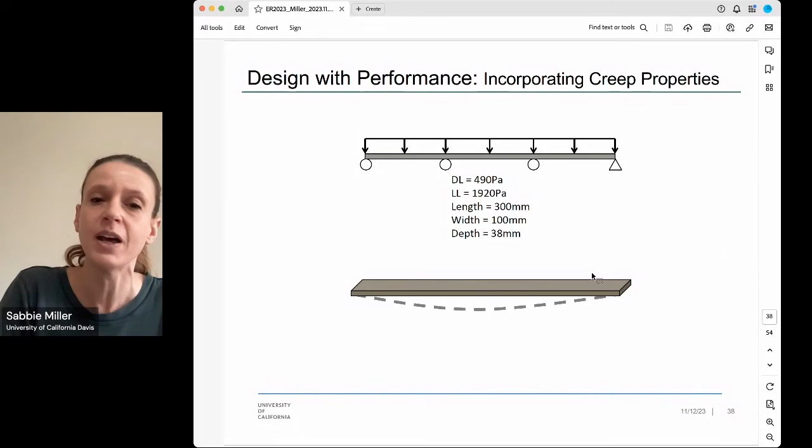And so you could start to look at this, pairing it with structural design and say, well, if we have deflection controlled members, and if we exceed that deflection, maybe we need either more material or we need to replace it. How do we pair that with the longevity of these materials?

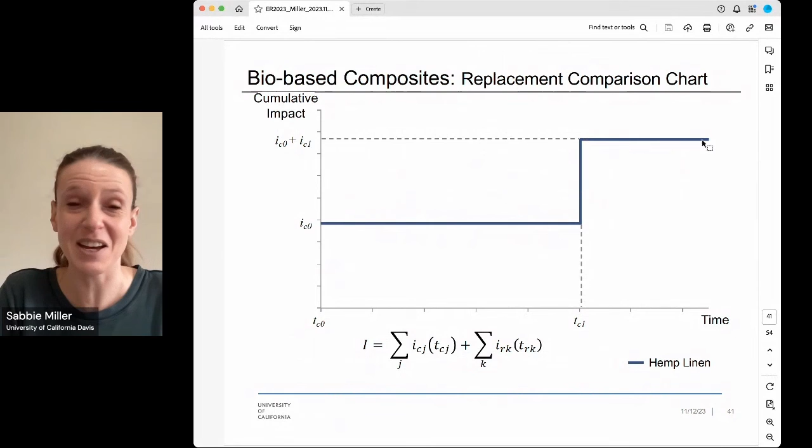So here I'm showing that conventional deck as well as those polymer-based composites and their typical lifespan before they reach those deflection limits. We could then couple that with life cycle assessment, where here we have our cumulative impact. So impact at time 0, produce a material, impact at time 1, replace that material so that you don't exceed the deflection limit. That means we've driven up our impact.

And compare it across a bunch of different materials, where we could actually see that if we're able to engineer a material that, even if it has slightly higher impact on day 1, if we don't have to replace it, we might be able to hold on to that carbon for longer and not have the burdens associated with additional production. Now, of course, we could expand that kind of mentality to some of our other materials.

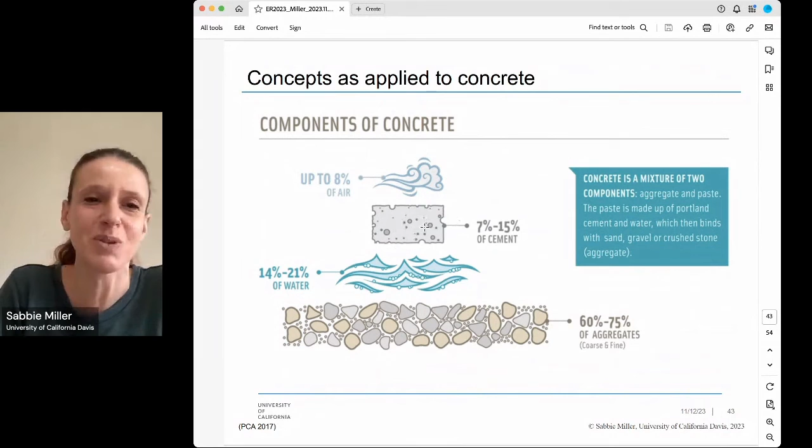Let's focus in on concrete for a second, because we consume so much of it. And keeping in mind that concrete is composed of cement, water, and aggregates, as well as a little bit of air that gets stuck into the material. How can we start to engineer this throughout its life cycle to mitigate impacts?

And that can include things like manufacturing, making sure that we're using the right amount of cement relative to the aggregates, and maybe blending in some other components. Maybe we can improve the strength or how we're designing the members. Maybe we could start to elongate how long we use these materials through things like repurposing. And maybe we could get away with some better end-of-life management.

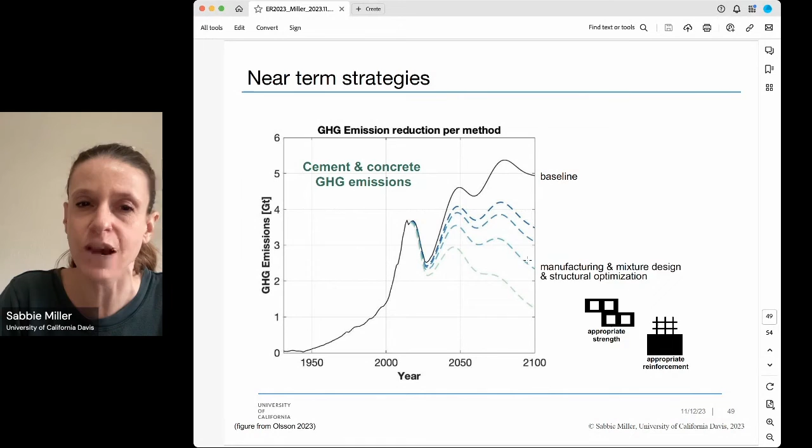If we then tie that to improving the longevity of the system, we can have even greater reductions, so much so that with strategies that we already have available to us, we can have a 75% reduction in annual greenhouse gas emissions by 2100 for this class of materials. And ideally, re-engineer the remaining amount of materials to act as a carbon sink.

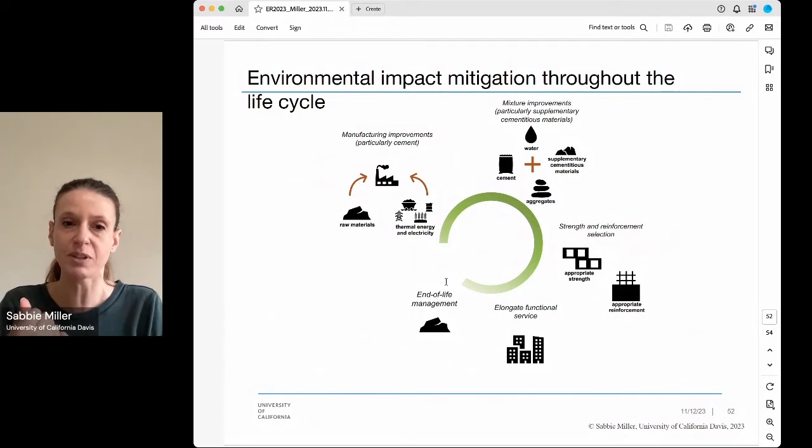So actually engineering throughout the life cycle of each of these classes of materials, looking at alternative resources to create carbon sinks, minimizing environmental impacts where we can't undo the environmental burdens, are going to be key pathways to our changing the built environment.